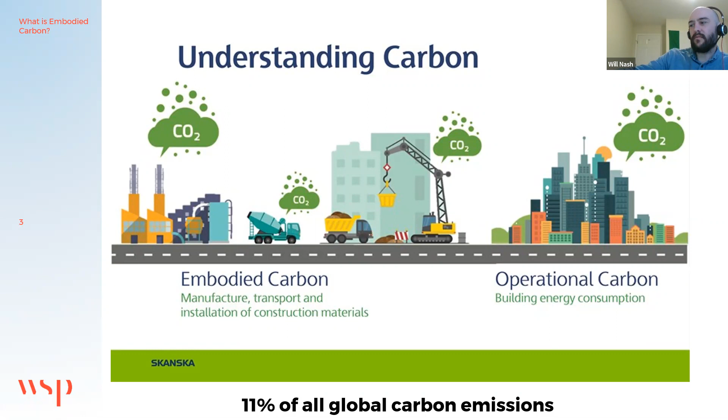So when we look at carbon, there's the difference between embodied carbon and operational carbon, and 11% of all global carbon emissions are due to the building industry. And when we look at the whole life cycle of a building, and we're accounting for all of the carbon in there, the focus to date has been on this piece about the operational energy and the carbon associated with that. But the embodied carbon encompasses these components that run from all of the manufacturing, resource extraction, transporting to the project site, the actual construction activities and the maintenance activities, refurbishment that have to happen.

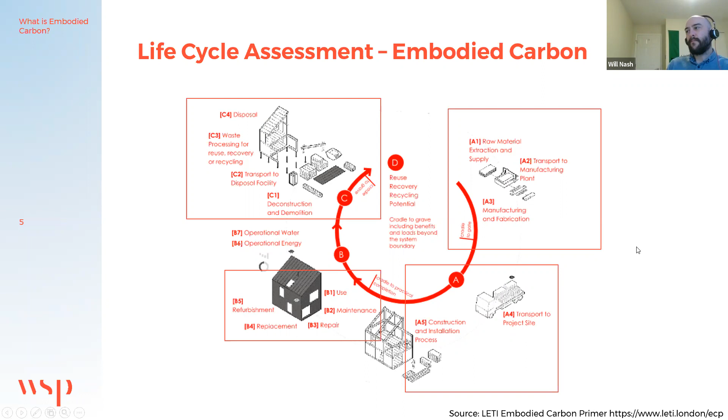And then at the end of life, some of these aspects here around deconstruction, disposal, and those sorts of carbon emissions that are associated there. And so, when we look at the total global emissions by sector, the global emissions that are associated with all of these things then come up to roughly 50% of carbon emissions.

So why do we care? Well, we know that we've done a really good job of reducing the building operations, as Elle sort of touched on and Scott touched on as well. The operational energy of buildings has been optimized over the years to the extent that now a lot of the global north building standards are practically passive house, or near enough. But these emissions here that are to do with the embodied carbon are taking up a larger and larger slice of the pie. So ignoring those materials, those emissions, is almost half of the problem.

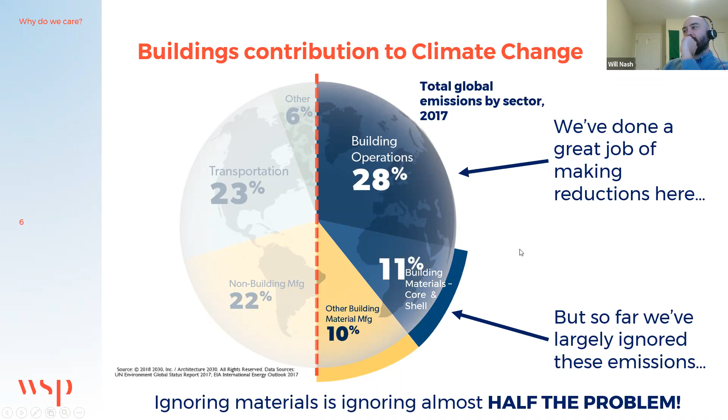And so we know over the next sort of 10 years, we need to take a great effort to reduce carbon emissions globally, with a lot of the research saying that we need to reduce global emissions between 45 to 100% by 2030 to have a chance of keeping temperature rises below 1.5 degrees.

And if you look then from today to 2030, the embodied carbon of new builds is going to be the majority of that carbon, because it's locked in from the beginning. It's sort of like a capital investment, if you like, of carbon emissions. And those operating emissions then obviously increase year on year. And it isn't until 2035 that operational carbon is expected to overtake that embodied carbon. And this is the time for action right now, where we need to really be focusing.

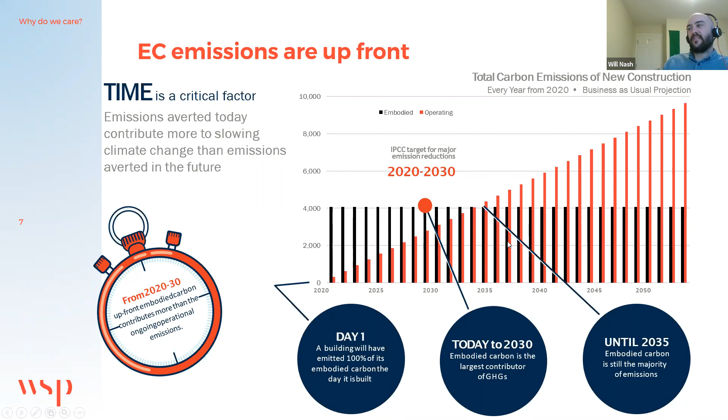And the other reason we care is that there are a lot of these building standards today that are incorporating aspects of embodied carbon. So in Canada in particular, the Canada Green Building Council has introduced the zero carbon certificate, and this has requirements for reporting and offsetting embodied carbon. The Living Building Challenge, which is, I guess, increasing a little bit in the number of buildings going for that sort of certification, is probably still the highest standard of certification you can get for a building, and they require reporting of all of the embodied carbon and 100% offsetting.

Within LEED 4.1 now, you can achieve up to 9 credits for embodied carbon activities, and then the Buy Clean policies that are being rolled out in the US, and we'll have a map of that. And so when we look at Canada in general, from the federal government, the carbon tax is one aspect, but also the federal government has introduced the Greening Government Strategy, and all new builds need to be net zero carbon. So that includes consideration of the embodied carbon.

And then within the province of British Columbia, this is what I'm more familiar with, all new builds in BC require LEED Gold, which therefore translates to demands for embodied carbon accounting. And the City of Vancouver, through their Climate Emergency Action Plan, have committed to a 40% reduction in embodied carbon by 2030. So these are big drivers for us for measuring and reporting and reducing the embodied carbon.

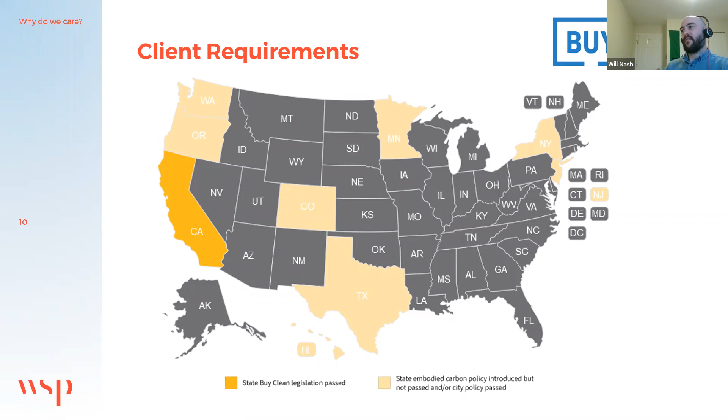And then in the US, the Buy Clean legislation has passed in California, and it is under consideration in these other states, as well as federally. And there's some expectation that the Biden administration will bring in a federal Buy Clean Act. What that means is that specifications and policies from local to state to the national level will have requirements to reduce their environmental impacts, including considerations of the embodied carbon. And so this will likely have a flow-on effect to the Canadian market for manufacturers that are selling into the US, but also for products coming from US manufacturers and competing in the Canadian market.

So yeah, Lizeth, if you wanted to take control there.

Could I ask you a question, Will? Sure. The Buy Clean, is that carbon specific, or is that a package of environmental improvements? It's a total package. So it's really looking at policies in general, but, for instance, some of the early Buy Clean Acts in Washington State and California set limits on the embodied carbon allowed, for instance, with cement. So they have the concrete Buy Clean in California that has an upper limit on how much embodied carbon you can have in the concrete. And those sorts of policies we expect to flow on to other building materials as well. Right.

Okay, so now let's move to how do we account for carbon? So we do it through a life cycle assessment, or LCA, which is an analysis of a product's entire life cycle in terms of sustainability. But what are actually the steps for conducting a life cycle assessment? Well, to help the industry out, the International Organization for Standardization developed a framework for conducting life cycle assessment. And this framework has 4 main steps: goal and scope definition, inventory analysis, impact assessment, and interpretation.

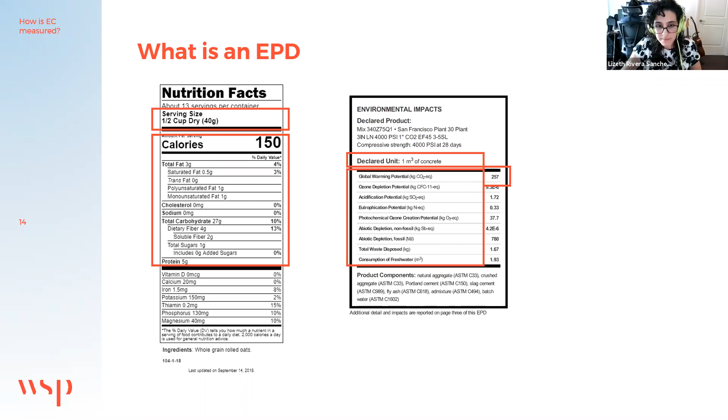So EPDs are valuable for the construction industry because they help us to make more informed decisions when selecting materials. However, we must ensure that we are comparing apples to apples. And the problem is that, as you can imagine, there are multiple ways to perform a life cycle assessment of a product. And based on what you select as a functional unit, system boundaries, temporal boundaries, etc., you can have multiple results for the exact same product. So how do we normalize the life cycle assessment parameters to make sure that all products are considered with the same things?

Well, the first attempt to do that is through a PCR, a product category rule. A PCR is a document that outlines the requirements of a life cycle assessment. And it provides rules, requirements, and guidelines for developing an EPD for a specific product. There are PCRs for many products, such as concrete, windows, steel, etc. Actually, you can find a PCR for pretty much everything, and they are developed through an open and transparent collaboration between industry professionals, life cycle experts, and public stakeholders.

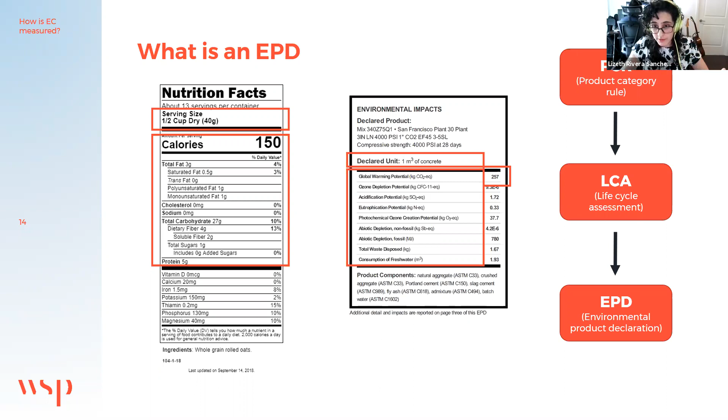So, in a nutshell, to develop an EPD, first you need to find the PCR of the product category. Then you need to perform the life cycle assessment based on that PCR. And finally, you need to report your results as an EPD. Of course, these results will need to be verified by a third party. It's not just that easy.

So now, talking about fenestration EPDs, we can see that many manufacturers have already developed environmental product declarations for windows. So you might think, well, that's perfect, we are set, we don't need more. But the problem is that most of them have been done for European products that could have been manufactured with different technologies, energy sources, and materials than we have here in North America.

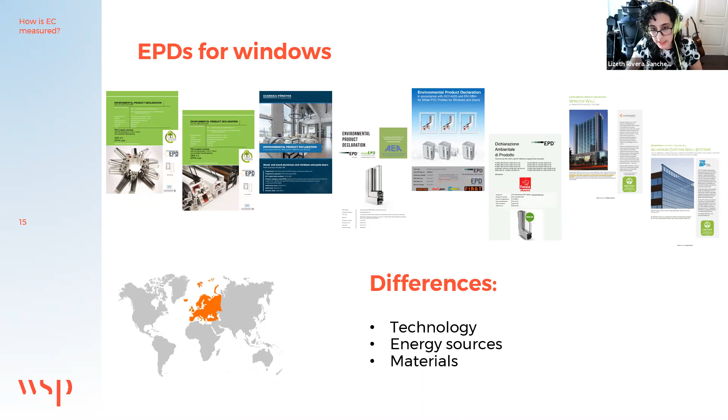So now I think I can pass it to Scott. Thanks, Lizeth.

There we go. So as Lizeth mentioned, it's important to have EPDs for local products or products that are manufactured in North America. In my own experience, I've worked on new development projects or even retrofit projects where we may be sourcing glass from Spain and fabricating the IGU in the Middle East and then assembling it into a curtain wall assembly in North America with aluminum that could be coming from either the US or Canada. And so there's a lot of sources for products in the fenestration industry.

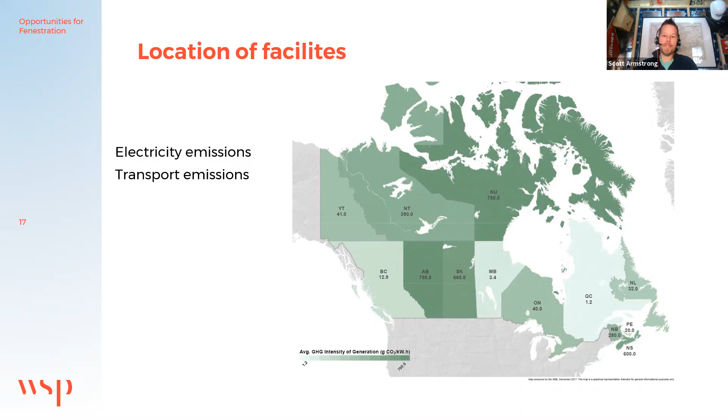There we go. Oops. I'm not sure what I did there. Let me see if I can go back. You're getting a reverse. There we go. Apologies for that.

And also, when we think about the fenestration industry, the systems that we deal with are made up of many different components. So there's certainly a virgin material feedstock challenge. We know that recycling vision glazing, for example, is very difficult. There's a whole issue of trying to separate materials, glass that may be coated or aluminum that may have different coatings on it, not to mention all the sealants and the desiccants and spacer bars, and separating all these materials out to be able to reuse them.

And when we were planning this presentation, the question came up even within our own team, well, aren't windows a standard size? And we just know that that's not true. Every window is essentially a custom size, even in the single family residential market. And so reusing products directly is also very difficult, if not impossible.

You can imagine too that with different processes, aluminum can have very high recycled content, but for vision glazing, for that optical clarity, it's very difficult to do that. So the end of life is a big question for glazing units. It's maybe a little bit clearer for framing systems like PVC or maybe even for aluminum. But there's a lot to consider when looking at the feedstock and how that's contributing to embodied carbon.

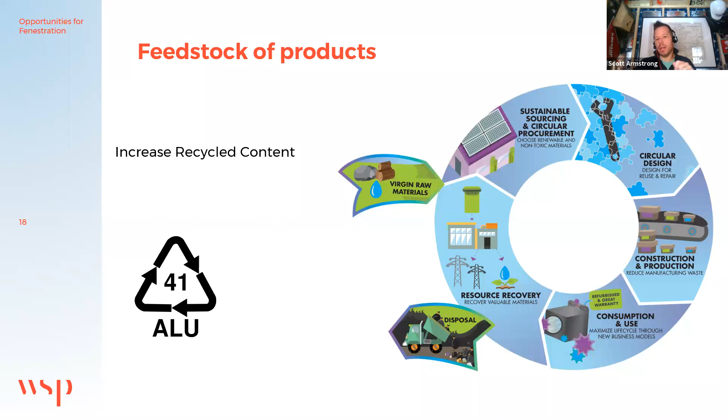But we also have to think about things like durability. So how long will the window system last? And we've seen some reports that may be driven by a particular segment of the industry that show their product in a favorable light based on a certain life cycle replacement plan, which may be skewing the data. So it's important to understand the expected service life of the building, the service life of the component, the durability of that product, and what the replacement cycle looks like if you're comparing across, say, a 100-year service life for a product.

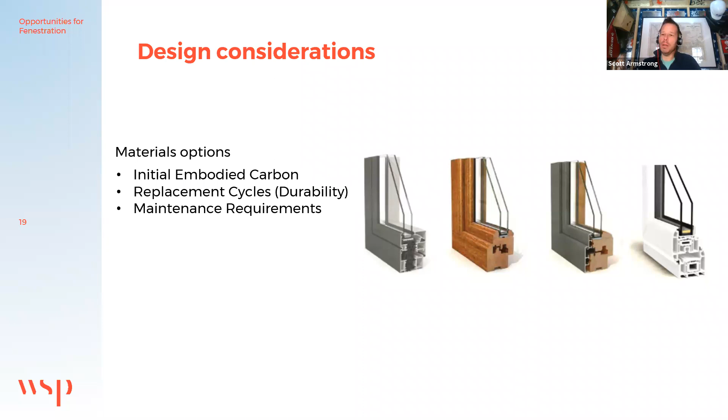And then maintenance issues are not equivalent across these systems. Obviously, I have wood windows on my own house, and I do have to paint them from time to time. But I also have a metal-clad wood sliding door, which has a lower maintenance requirement. But in the grand scheme of things, the maintenance needs to be considered, but the focus at this point really needs to be on developing EPDs and understanding the embodied carbon from the fenestration system at the outset.

I want to talk a bit about existing buildings because I see this as essentially already spent carbon. Existing buildings represent 50% of the building stock that will still be here in 2050. They incur a lot of operational carbon emissions because they're generally inefficient, although you might argue that maybe modern buildings are not as efficient as we would like or think. And we know that existing buildings do represent a significant opportunity for retrofit. The issue is, though, that this enclosure usually comes to some sort of end of life where we have to do a significant retrofit.

WSP worked with Canada Green Building Council to develop this roadmap for retrofits in Canada. And really it came down to these 4 fundamental points: recommissioning, deep retrofits, renewables, and fuel switching. We're going to focus a bit on deep retrofits because, in my experience, we do a lot of existing building work, we do a lot of new development, and the marrying of those two worlds of the newer technology, improved efficiency with this already spent carbon that is currently the contributor to climate change, presents an opportunity to do these deep retrofits.

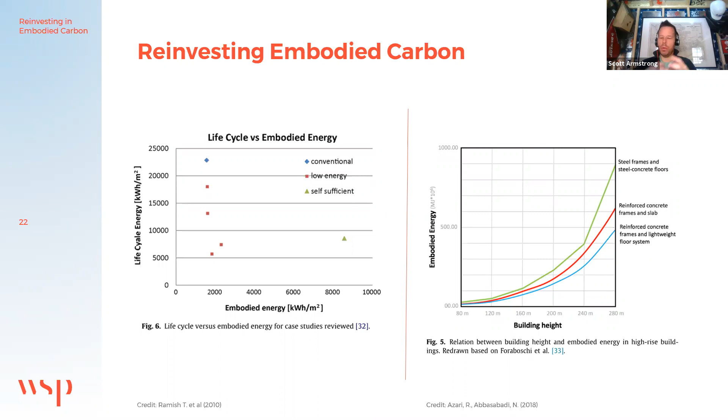We also know that as buildings get taller, sometimes they require more substantial structural frames, and the choice for that framing system can significantly influence the embodied carbon. And you can see those lines on the right graph showing the difference between, for example, a steel frame with a steel and concrete floor versus maybe a reinforced concrete frame and a lightweight flooring system. So as you go taller, you get heavier. Maybe there are more wind loads. You're increasing the weight of the structure, so you're reinforcing and adding strength to the lower floors. So there's this whole knock-on effect of the embodied carbon in the structure.

And as I mentioned, the traditional thought or reality was that embodied carbon was a relatively small portion of the total life cycle carbon emissions for a building. And that's largely because we were living in this conventional world where buildings were operationally inefficient, and we didn't really need to focus a whole lot on embodied carbon because we knew that it was more about operational carbon. But as we push more and more towards low energy or net zero energy, embodied carbon becomes a much more important part of the picture.

Sorry, it's not advancing for me. There we go. So I have just, again, a couple of slides in quick progression.

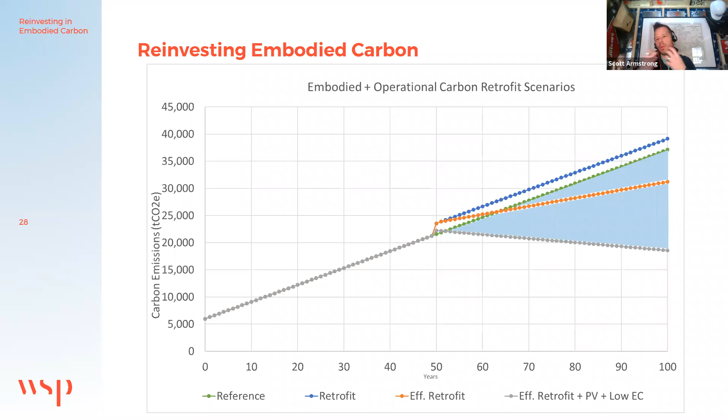Yeah, you're right. Maybe I'm not using the right term, but I would equate that to, if I'm generating more electricity on site than I'm using, then effectively I'm carbon negative, right? So I may be transmitting more to the grid than I'm using. So in that case, I'm taking that as my sort of sequestering carbon, or I'm offsetting someone else's potential carbon emissions by providing to them renewable energy from my site.

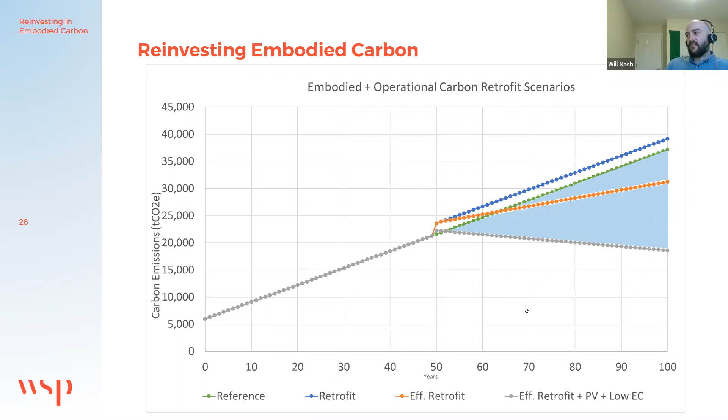For example. Yeah. Just to jump in here, so there are some materials coming on to the market that are utilizing agricultural waste or high rotation crop cellulose that is then processed into structural boards and members, right? And those technically are sequestering the carbon in the building. And there's a whole movement for buildings as materials banks, and some discussion around those sequestering strategies. So if you can take that in concert with what Scott's talking about, there is an opportunity to really start looking at ways to sequester and reinvest in that embodied carbon.

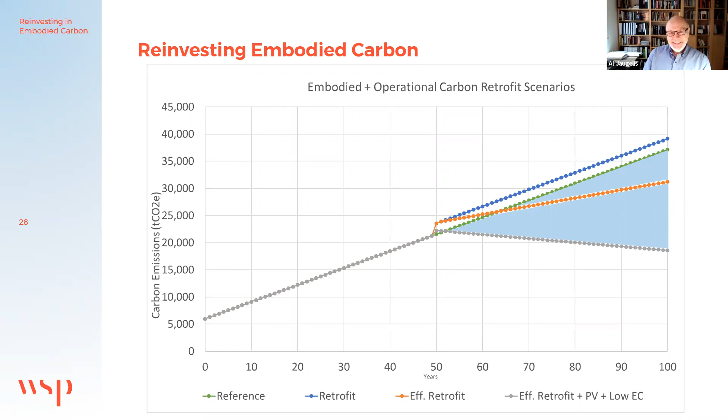And we didn't get into it in this particular presentation, but it's interesting. We were just having a tech session on innovative new materials, and there is a new transparent wood product. It's got a lot of attention lately. Yes, I haven't looked super close at it in terms of how that might work in the fenestration industry.

But again, there's this innovative drive for low embodied carbon materials, which, to Will's point, if they're plant-based, could technically be a sequestration strategy. Again, depending on how much energy it takes to process that material. But being a plant-based material, it is essentially using carbon to grow. So that's the lens in which I'm looking at this particular approach.

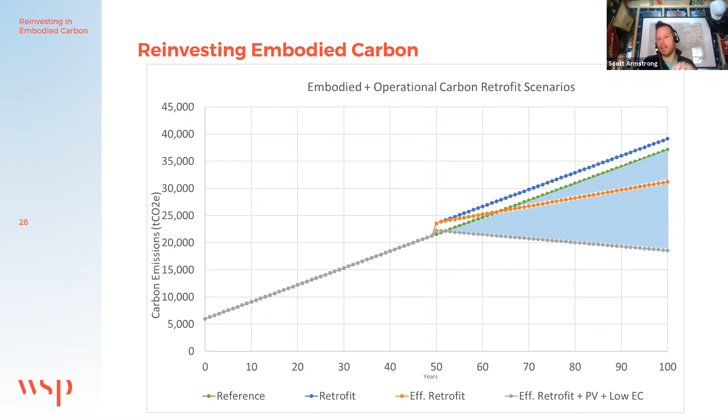Oh, thank you. So to give just two, again, very enclosure specific scenarios, one very possible today, and then one more future looking. We did work on this project. It's a 2-tower commercial office building which was reclad or overclad. In this case, we were able to fully retain the existing curtain wall framing, all the back pans, and the entire structure and anchoring behind it, and then graft on this new skin with a pre-glazed aluminum cassette frame with a new IGU on the front.

And then thinking a little bit more about that future ready notion of heat waves and additional solar heat gain and the demand for cooling in commercial office or even residential buildings, we were able to significantly reduce the solar heat gain coefficient to help mitigate that future demand for cooling, which in Ontario for sure is putting a stress on the grid. We're seeing that now with the storms in the US, where the electricity grid is not capable of that sort of resilience. So adapting buildings so they can accommodate that and keep that load profile within traditional norm ranges.

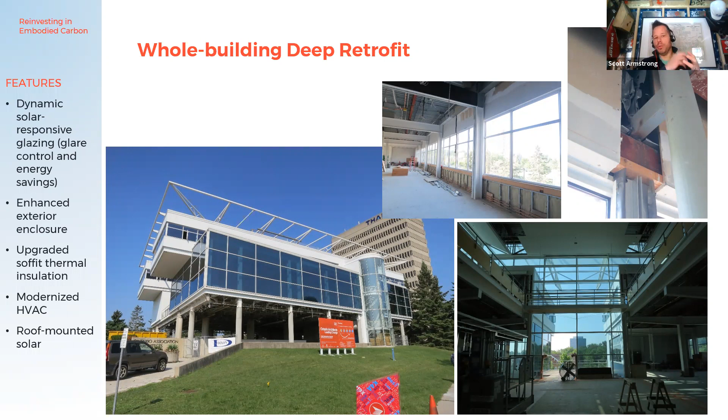So that's just two examples of the possible today to be expected life cycle replacement or reskinning of existing buildings to this level of whole building deep retrofit that accounts for enclosure and HVAC and maybe some renewable strategies and air tightness.

Will, back to you. Sorry, just need to unmute.

So yeah, I guess in summary there, these are the key takeaways, I think. As Al, you mentioned in the introduction, there's a bit of a shifting focus now. So the operational energy, that piece of the puzzle is very well understood, and the performance of new builds and retrofits is only getting better to the point where we're having net zero buildings, and so that focus is shifting now from that operational carbon to the embodied carbon.

Part of that then is there's evolving expectations from our clients and from the industry, which means that we're expecting to see increasing demand for EPDs of products, including fenestration products. And so beyond that, once we're measuring the embodied carbon in those products, there is an expectation that there'll obviously be a drive to reduce that embodied carbon in buildings. And of course, that is around reporting and transparency requirements, and trying to have whole industry level product category rules, so that we're comparing apples with apples and making sure that everyone's on a level playing field.

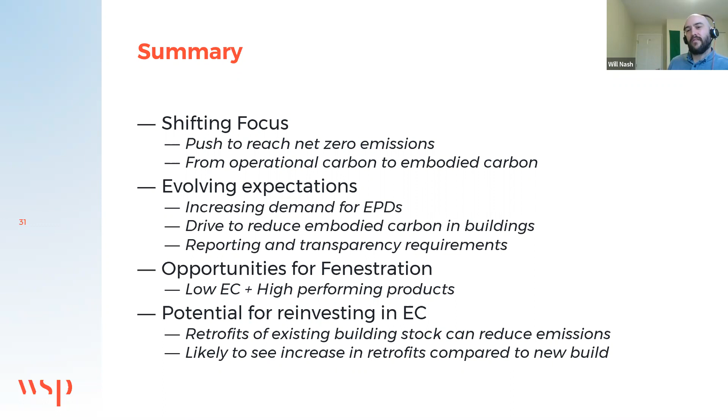And the other thing is anything that you have to coat, right? You're adding that material on as a coating that then has to be maintained. The embodied carbon, I don't think, is necessarily a very big contributor for that, but it is an ongoing concern. And certainly natural materials that don't need any additional coatings are usually going to be preferred. Anyway, that's my 2 cents.

Right. In the durability discussion, I think often the focus is on your primary framing material's durability, but it's very rare that the primary framing structural member is what fails in any fenestration system. Absolutely. It's going to be the weakest component in the entire system: the weather strips, the hardware, the difficulty of replacing glass that triggers the replacement. And sometimes the focus has been too much on the primary framing material, with people saying, my material's better, it lasts longer, and not appreciating that,

you look at those lousy aluminum windows from the 70s and 80s. The aluminum and single glazed windows will stand forever, right? They'll be there hundreds of years from now. But what was failing on these windows? The rollers wore out and you couldn't operate the sliding windows. You couldn't easily replace the glass. The frame designs trapped water and caused insulating glass units to fail prematurely, triggering multiple glass replacement cycles.

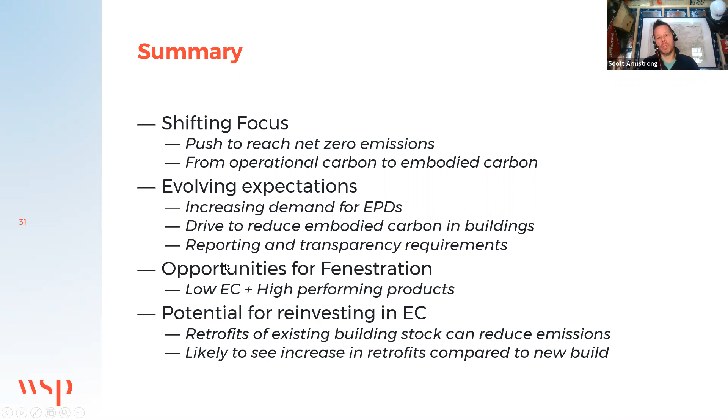It's the IGUs, like you said. It's all the exterior. Even the metal panels are chalking and fading, and some of the clips are coming loose. All these things that are foundational to safety and ultimate performance. It's not the primary framing member.

And that's what I like about a lot of these reskinning projects that we're doing, just learning about how much we can keep, to both reduce the new embodied carbon, but also reduce the scrapping of material and disruption to tenants. These are all fully occupied buildings, not the OAA headquarters, but so far all of our commercial office reskinning or recladding projects are fully occupied buildings. So again, that's speaking to the resiliency or the robustness of those primary framing members that get to stay in place.

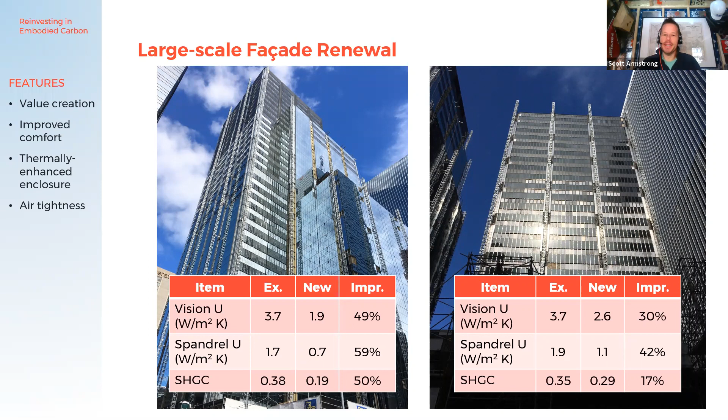And really, with curtain wall systems, when it comes down to it, it's a lot about that thermal break. And that's usually outboard, right? It's not inboard. So doing that retrofit from the outside makes sense.